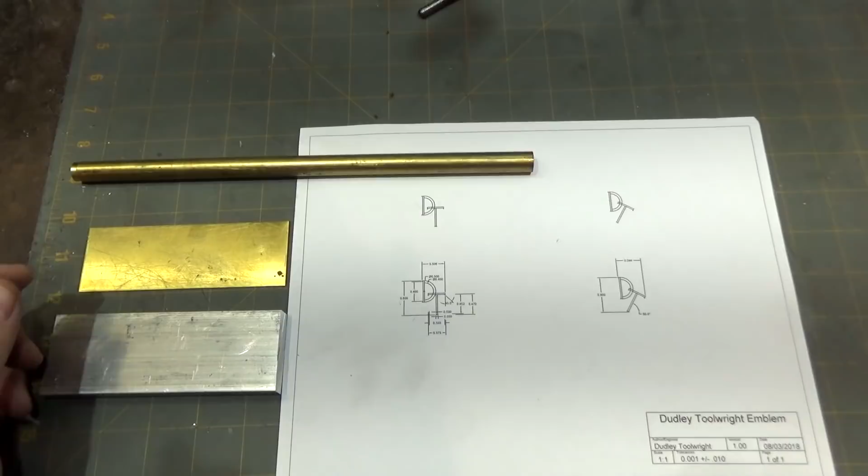Hi and welcome. This time around I'm going to attempt to make my emblem out of brass, and it'll be buried in epoxy so that I can take slices of it and use it to put on the tools I make. Hopefully it'll be clearer when I proceed further.

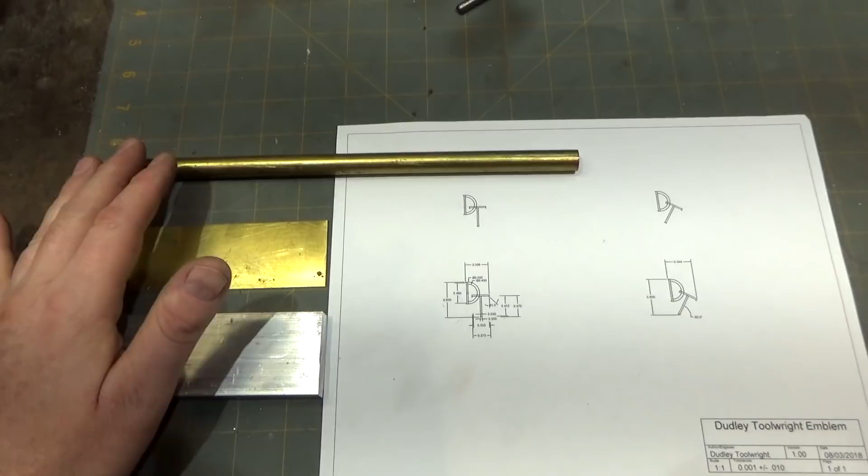I have never attempted milling things this thin and leaving profiles this thin out of such soft material. I might need to change materials from brass to something like stainless that's a bit stronger, but we're going to give this a shot.

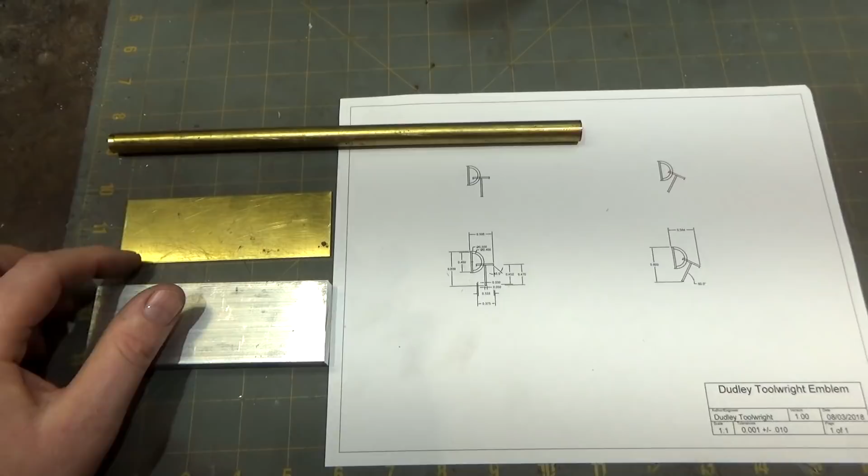First up, I'm going to take this piece of 50 thousandths brass stock and glue it to this piece of aluminum. That'll allow me to mill it down to 30 thousandths thick in the middle sections, because there are some little spurs sticking up, so I'm going to be taking 20 thousandths off of this material.

I have two versions of this. I have one with the straight T and one with the tilted T, which I kind of like. We might try both, but initially let's just see how this goes.

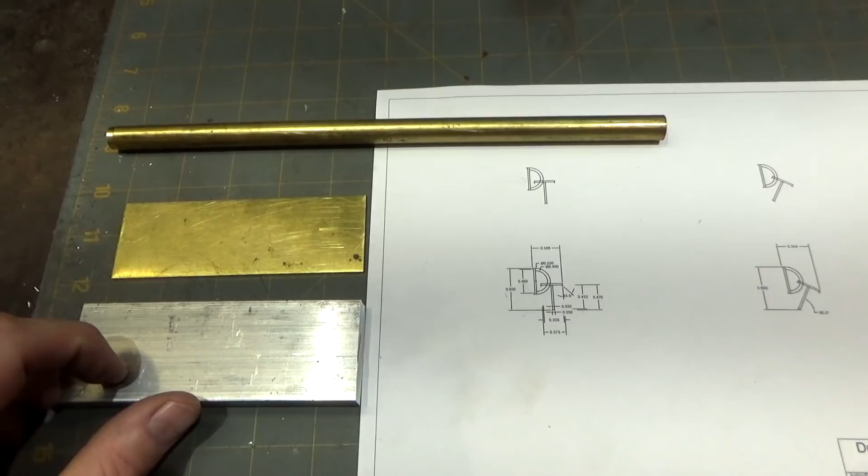So I've got to sand these materials, get some super glue in here, put this in the press, in the hydraulic press, and squeeze it together until the glue sets.

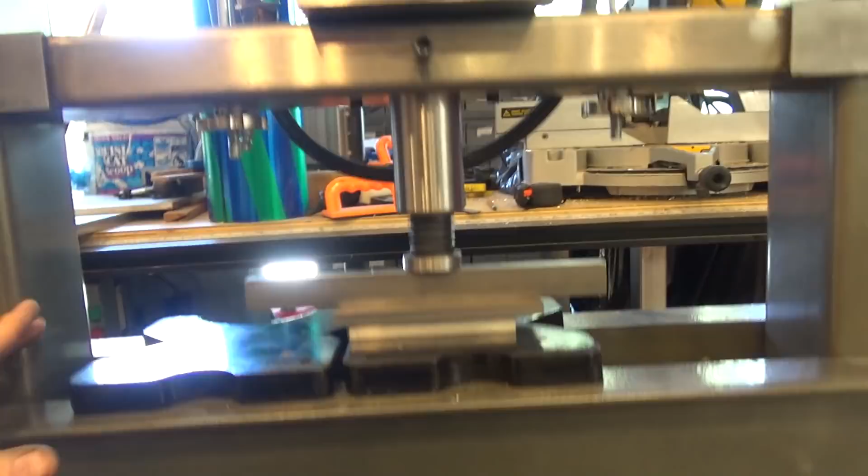So here we are at the hydraulic press, and down below here is the aluminum. Just above it is the thin 50 thousandths brass, which you can't easily see. Above that are a couple steel plates, or cold rolled steel plates, that are just for pressure spreading.

And I'm going to leave this here. I didn't crank on the pressure too much. Just put some pressure on it until it gets a chance to cure, maybe a few tons pressure. I didn't really push this thing hard at all.

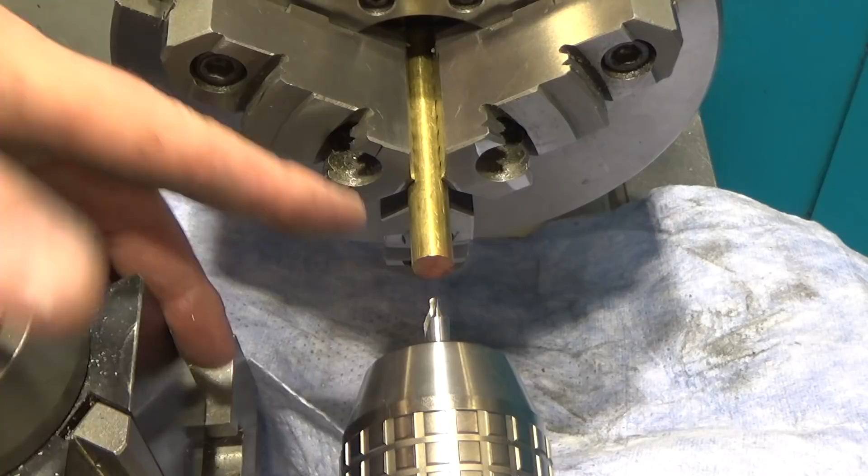So I have no idea if I'm going to be able to pull this off, because I want to get this all the way up to within 50 thousandths a side. I don't know if you can drill that close without potentially tearing it, plus I want to go in about an inch. So I have no idea if this is going to work, but let's start with center drilling and we'll play it by ear, right? Live and learn.

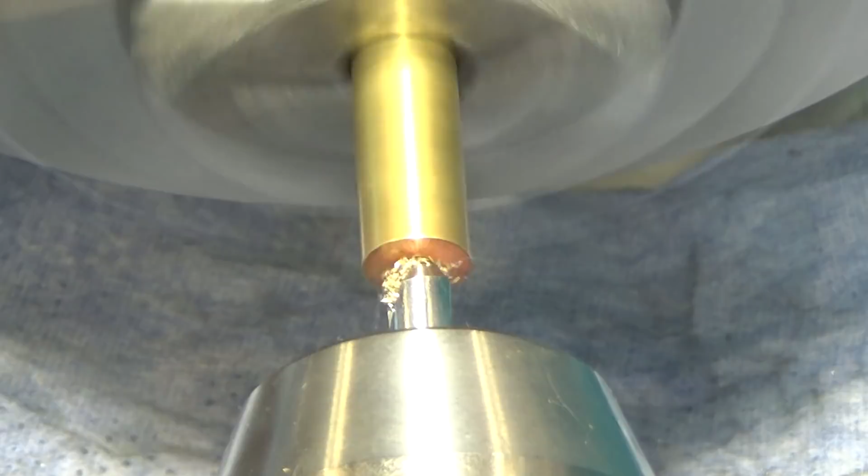Using the DRO I built into my tailstock to set depth. I'm hoping because this is brass I'm going to get away with this, but I don't know.

Chips are kind of packing in the end here. Should have retracted it sooner. It just seemed like it was cutting really well.

Alright, next up what I'm going to do is, instead of using the next size up drill, which I was going to do 3/8, I'm going to switch to a 3/8 inch end mill, hoping that that will get a straight cut like a reamer, and then when I go to about 400 thousandths, we'll see how that looks.

As you can see, this is 0.375. I want to hit 0.4, and you can see it's already looking really spooky. So I don't know, we might slow this down a little bit. Let's try 300 RPM, see how that works out. And I'm obviously going to have to peck with this.

So in the base here I have the piece that is going to serve as the mold base for this assembly from my Dudley Tool-Rite, and I'm going to mount this guy in here, and I need to drill this off center as per my drawing, and then I'm going to mill half of it off so that you've got just part of the D.

So this whole thing is going to sort of serve as a fixture where I will cover the outside with metal and then fill this with epoxy, and all of the individual brass pieces, the flats and whatnot, will be contained inside and buried in epoxy, and then I will mill it flat so that I've got my DT exposed. At least that's the plan.

So first we've got to get this thing centered on the mill, and we'll use the Blake coaxial indicator. Since my coaxial indicator is a 3/8 inch shaft, I've got a 3/8 inch spotting drill, and the pip where I turn this should be dead center, so that lets me get really close.

Then I can bring in the final bit with the coaxial. So I've got the mill centered on this part now, which will be my mold base, and each one of those divisions is 1/2 thousandth, so we're off a couple of tenths. I zeroed my DROs, so I've got my 0 point in the middle.

Now I can dial in an offset to go off the edge and mill the hole. We're going to take a 1/2 inch end mill, and we're going to drill a recess for this guy to go in. We're not going to go down that far.

So we're going to try 500 RPM here. This might be a little bit fast. Yeah, some chatter. All right.

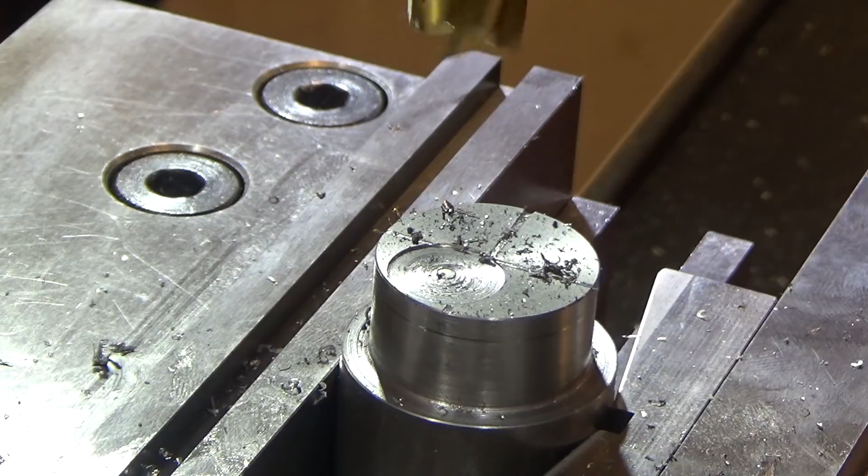So we're going to go back here. I probably should drill a center hole first, actually, because even though this is a center cutting end mill, it's a lot harder on it. Actually, it might not be a center cutting end mill. Looking at the pattern there, yeah, it might not be. All right, we're going to go grab a center cutting bit and pre-drill this hole.

All right, so here we go with the center drill. And we're going to follow that with a 1/4 inch. Here's the 1/4 inch.

Still a little high in the RPM range. That was 1,000. Maybe down to like 700.

Onto the 1/2 inch end mill. Put it up to, say, 200 RPM. That's too cold. Try 340 RPM.

Okay, and we're good.

So some poor planning on my part. I did score vertical and horizontal lines in here, but if I'd been really smart, I would have taken this guy and thrown it in the vise first and put a flat on one side so that I'd always have a reference side. Now I'm going to have to try and line this guy up. What a pain in the butt. That was poor thinking on my part.

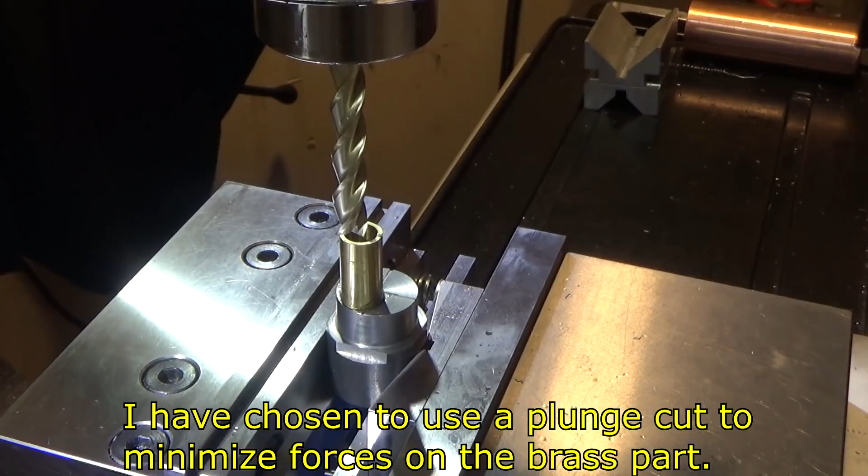Alright, so we're going to try and plunge cut this. We're going to speed up the mill to about 1200 RPM. We'll see how this goes. You want to take a smaller bite just to see how it goes. I put a depth stop on this guy. Okay, that's actually going really well.

Thousandth and a half left. I'm going to lock my x-axis. And we're going to come over here.

So now I have to do the final pass, straight across, because I'm coming down with a curved surface. So right now these have curves in them. So for the very finished pass, I've got to come straight across.

So now I can loosen this up, do my last 1.5 thousandths. Hopefully this won't squeak too much. Let's lock it off at the bottom. Not bad. It's a lot of stick out.

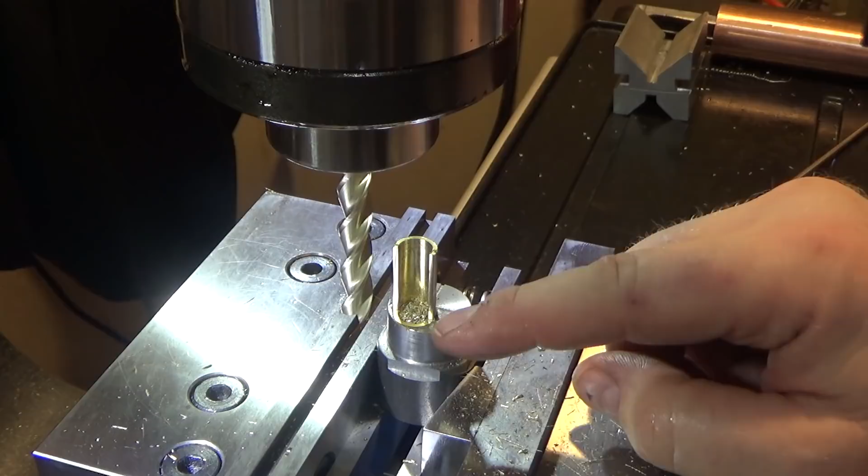Okay, we're going to call that good. So the curved part of the D is complete. Easier than I thought it was going to be. I had concerns about this much stick out. The reason why this is so long is I want to be able to cut off more than one of these because it's a fair amount of work to make. So hopefully that'll work out.

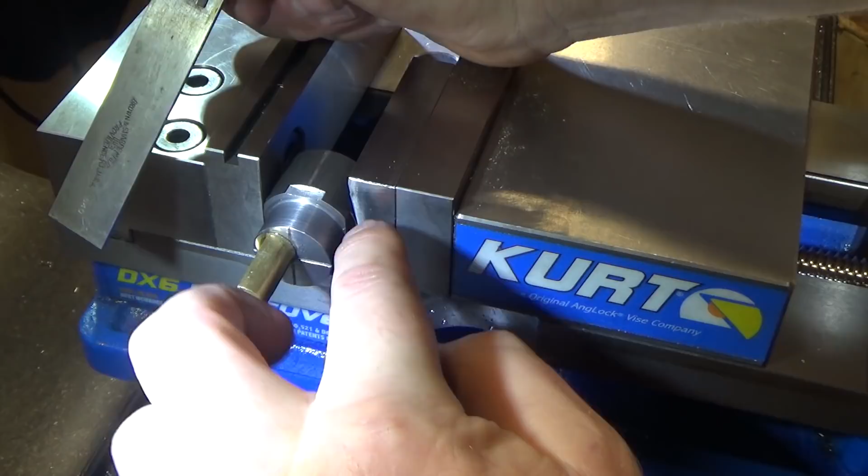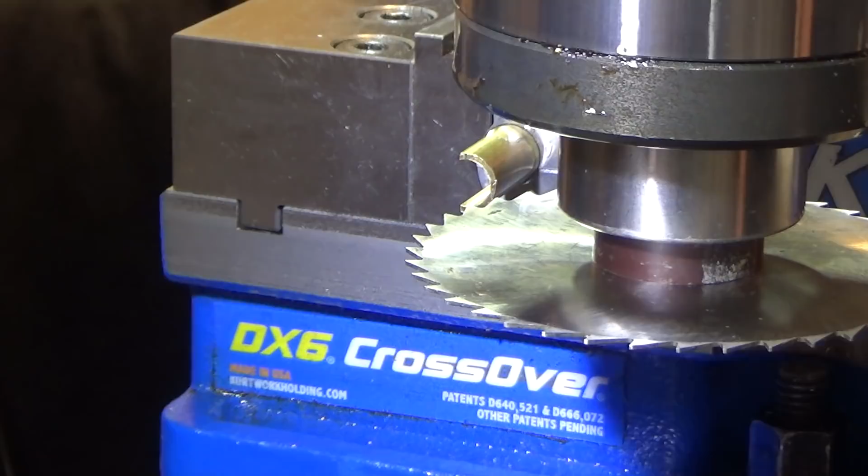I'm still not sure. So I used the flats I milled into the top of this while I was still in the vise before to set this up based on the top of my vise jaws here to get it square. So we should be good now. I don't know how well you're going to be able to see this, but I'm going to try and cut this guy.

And we're going to go in back gear, so we're going to shoot for about 140 RPMs. Let's see how it does.

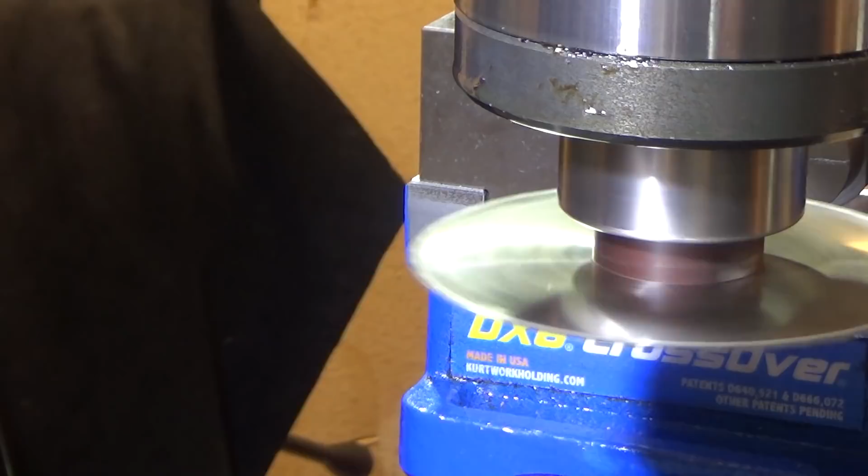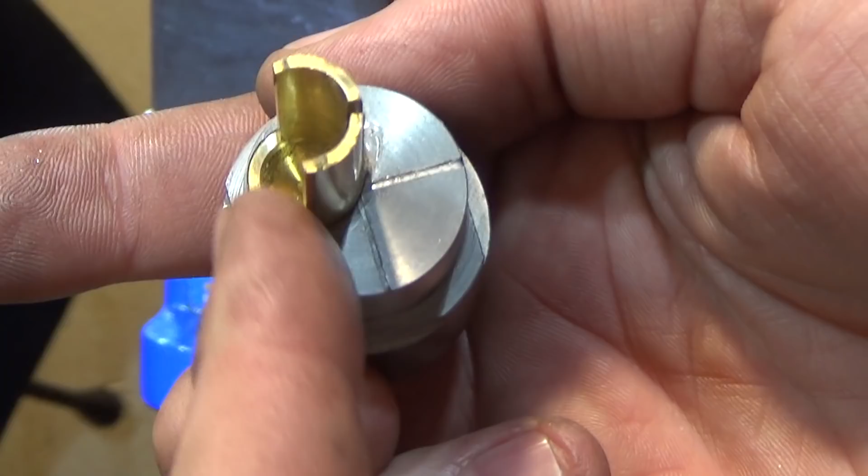So I don't know how much of that you saw, but the advantage of the direction I had the blade going was it was pushing into the work, so I was hoping that would help, and actually it looked like it didn't deflect too much. So there's the slot in it that the T is going to go in, so I need to make a flat piece in back. I need to make the T that's going to go down, and I need to press this together a little bit because it expanded upon being cut.

Built-in tension. So I have the 50 thousandths stock mounted to a piece of aluminum, super glued on. First thing I'm going to do is take this aluminum cutting bit and run it around the outside edges to square it up relative to the travel of the mill. The material is much larger than I need, so I've got plenty of room to work with, and this way I didn't have to worry about aligning it to the aluminum block. I'm just going to cut it square.

Then I'm going to come back with my indicator and find this corner over here, and set my 0 for that corner. So first step is going to be finding my Z-axis 0. Let's take this out of back gear.

1200 RPM. Let's find my Z0, just touch the aluminum a little bit. Nice. And the bottom.

Now our sides are all square relative to the table. So now I just need to find this point in the corner here after I deburr it a little bit and get my 0.

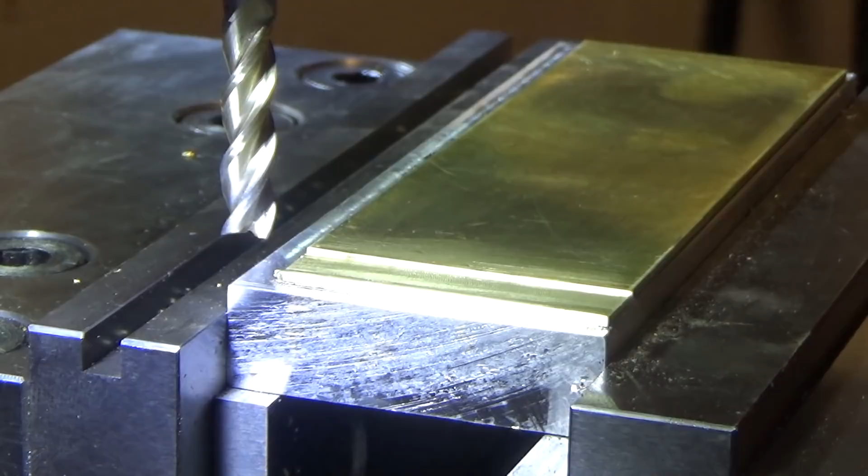Alright, so next up we're going to go Z-axis 20 thousandths, the first one, except for the end part. Now we're just going to cut out this piece in 2 passes. Do a 20 thousandths pass first. Make that 3 passes.

Next we're going to do the upright of the T, and we're going to have, we don't have a ridge on both sides on this one, just on one side. This flat side here will meet up with the cross piece on top.

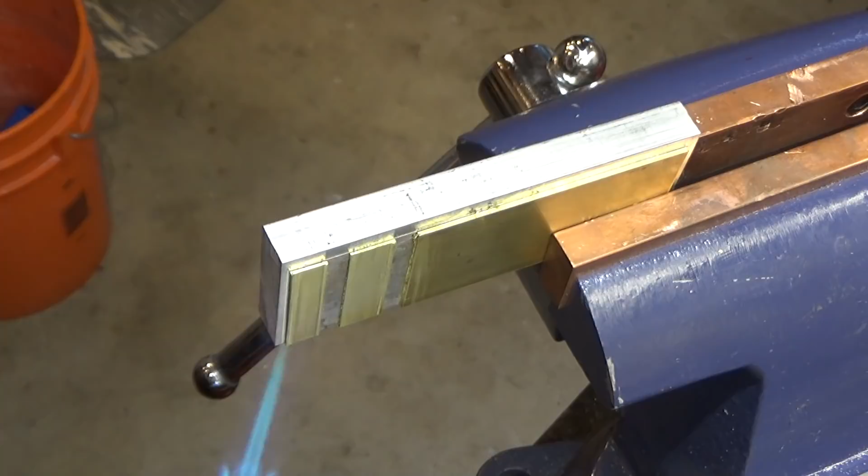So here are the 2 parts. Now we're going to try and remove them without damaging them, by heating them up, and I'm just going to use a little torch. So we're going to try and remove these guys off of here. I originally tried this with the parts horizontally, but there we go. My problem was that the torch kept going out because it didn't want to run leaning down.

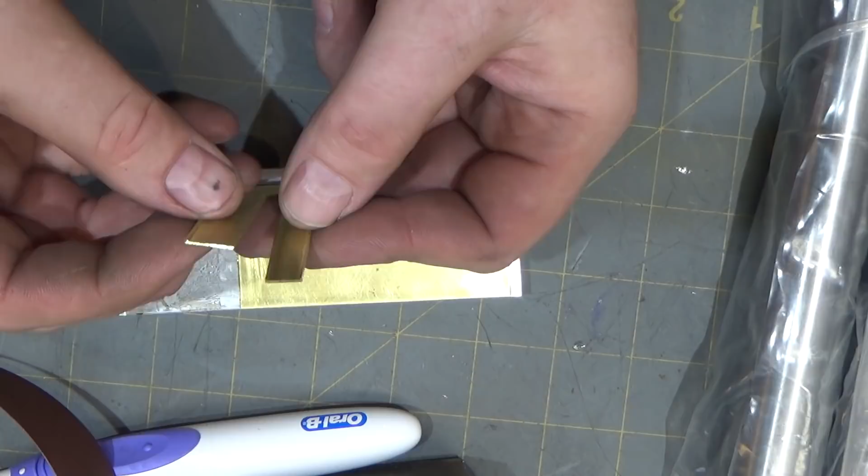Alright, so here's my 2 pieces. The other part's still attached nicely. And these will be connected together like so, which I haven't quite figured out how I'm going to do yet. I left little ridges on either side just to accent the shape.

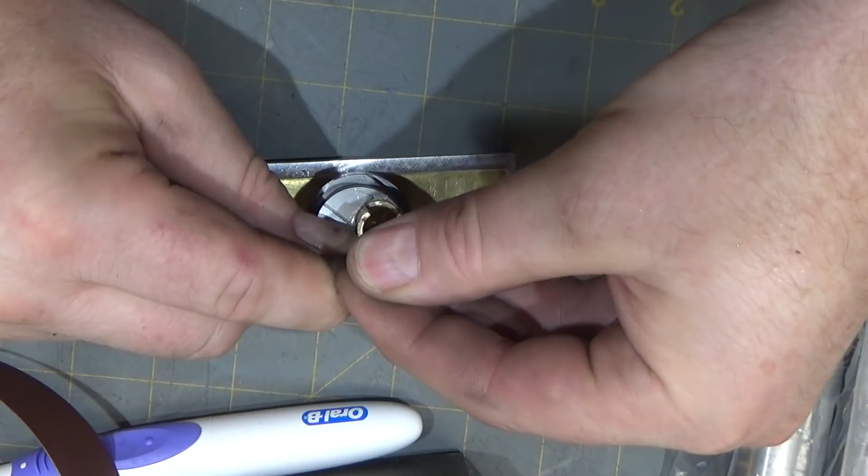And then those guys, let's see, this will be mounted in here sort of like this, and this will be mounted like this. And then I will fill it with epoxy and cut off the excess. And now you can sort of see the DT, right? So here's the part lightly glued up. These pieces are all different heights, but I will mill them all flat once I'm done.

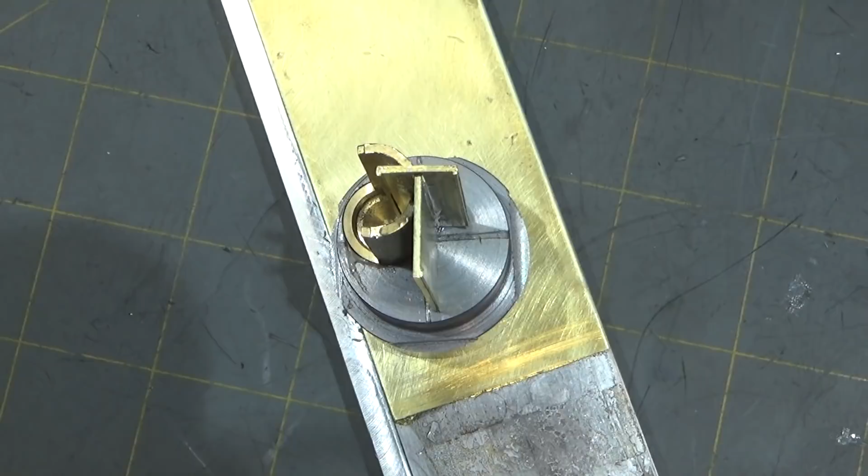So now I just need to make the piece that goes around this outside to contain the epoxy, and we should be pretty close to good. And here we are on the last couple passes, trying to get this to 1/1000ths.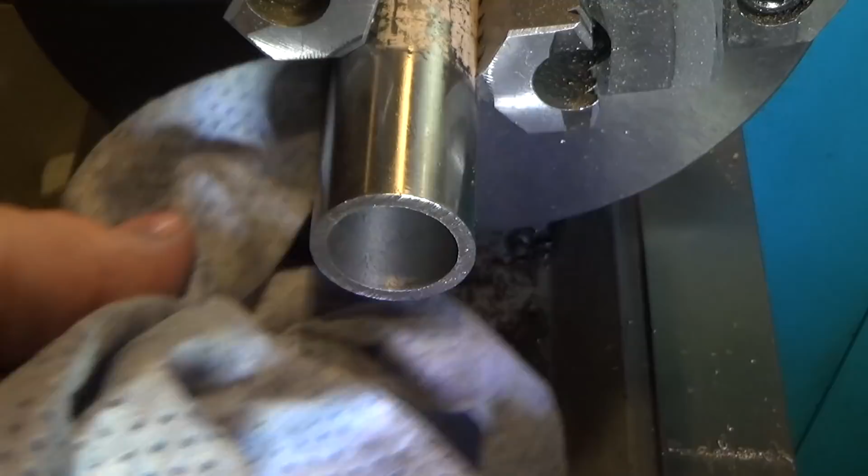So we're going to take about 15 thousandths this pass. In the last pass, we're going to slow the feed rate down quite a bit. Just to clear the chips and cool it off a little bit.

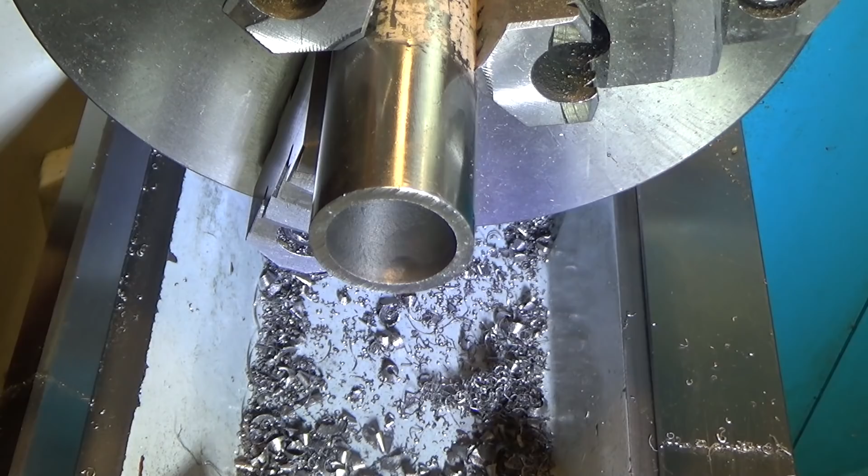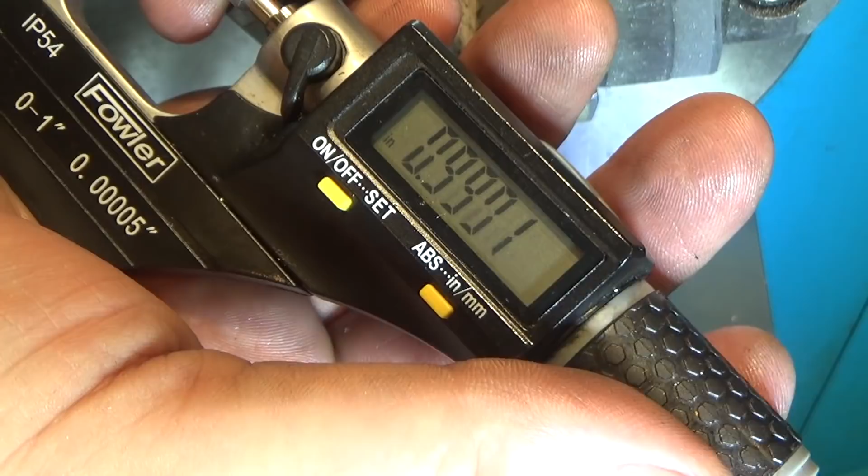Should have about 10 thousandths left. Looks like it's 11 thousandths. We don't have to be super precise. Take the last 10. So now we're just going to part this guy off.

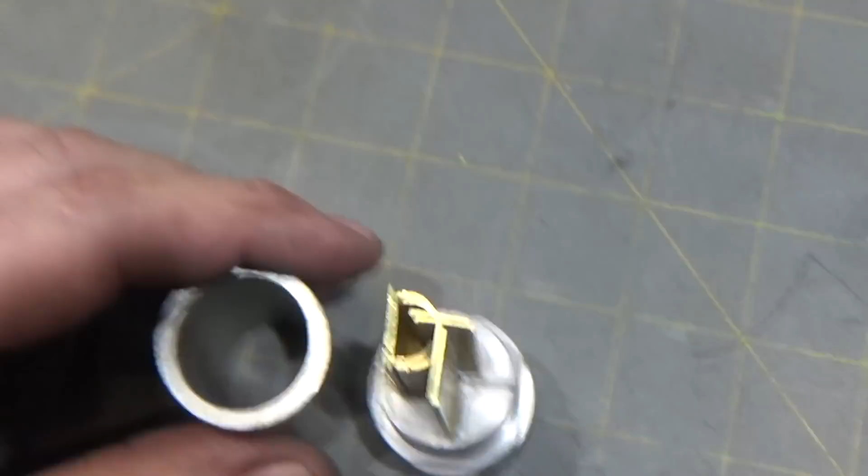So next up, we take the outside piece that I made. Sorry, it's tough doing this with one hand. Slide it over where it fits, and then fill the entire center section with epoxy.

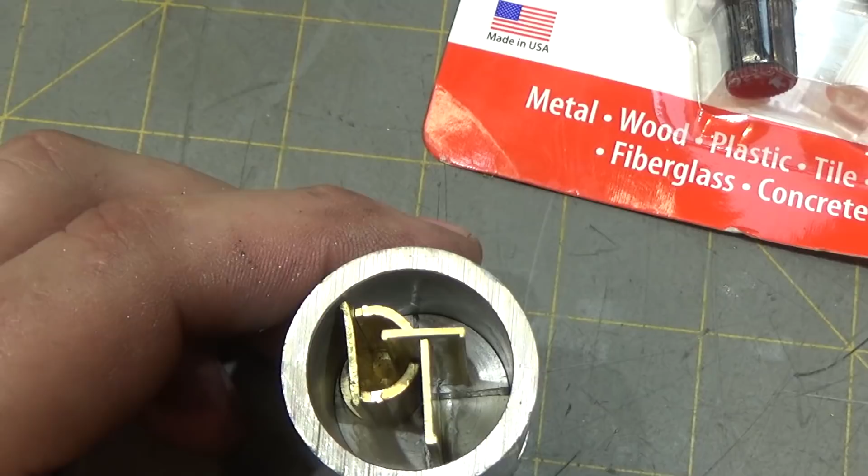I'm going to be using this JB Weld, and first I'm going to heat these up in some hot water to make them very fluid so that they'll pour in more easily, and then we're just going to fill this guy up. Hopefully we'll be able to do a good job. If I really wanted to be careful, I'd use a vacuum pump to get air bubbles out, but I don't have one at the moment, so we're just going to try it.

So I've got my epoxy in some really hot water. It's just under boiling, and I'm letting it heat up so that it'll become very fluid, and it'll probably make the reaction happen faster, so my setup time won't be as long, but this is some pretty slow epoxy, so hopefully it'll be okay. Next up, we're going to pour it into here, mix it in here, and pour it into the mold. So let's see if we didn't screw up too badly here.

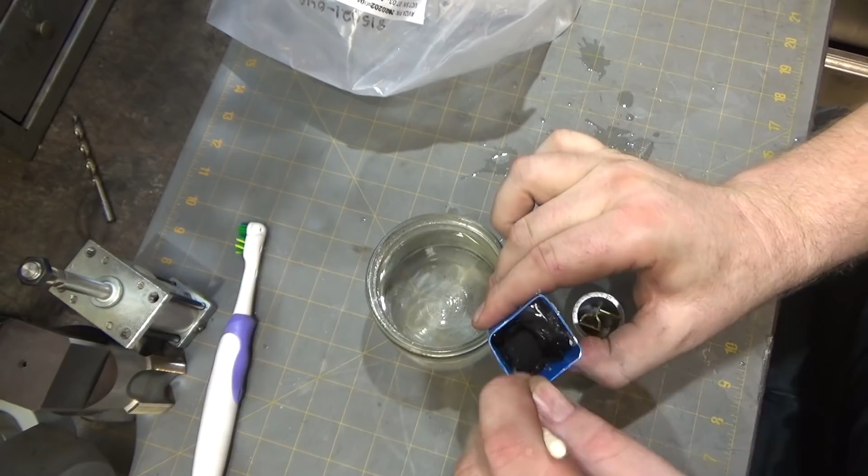All right, let's mix it up. All right, let's see if we can pour it in.

All right, now we just need to let this cure. It's going to take overnight, maybe a little faster since I heated it up so much, but we'll come back tomorrow and start facing off this end until we get to the good stuff. Hopefully this experiment will have worked.

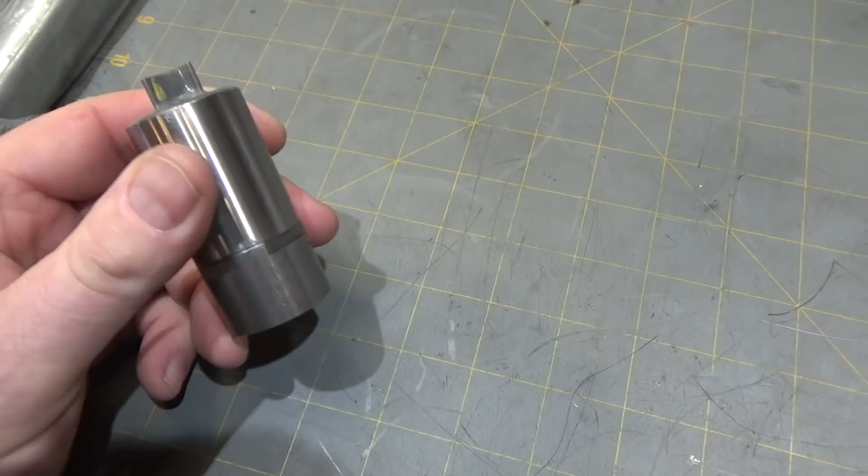So here's the part after the epoxy is cured for 24 hours. I'm going to take this part to the bandsaw and cut off the T here, and then we're going to try and face it on the lathe.

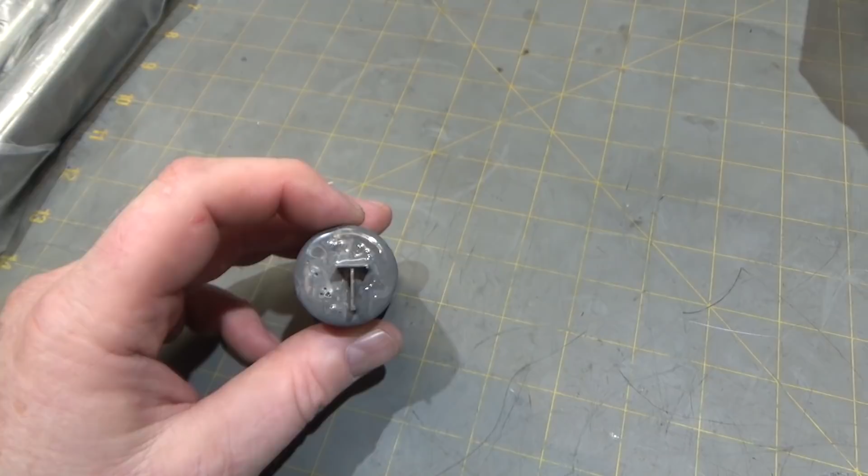This epoxy is kind of brittle, so I'm not quite sure how it's going to machine at all. It may not machine well, and this whole thing may be a disaster. Also, I was kind of hoping this epoxy would be darker than this. I thought I remembered it being darker, but this is sort of a medium gray. Anyways, let's trim this off, put it in the lathe, and see how we fare.

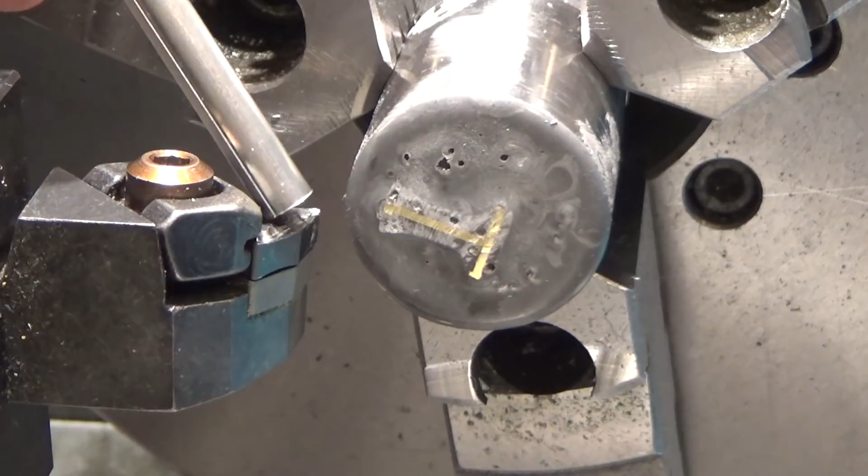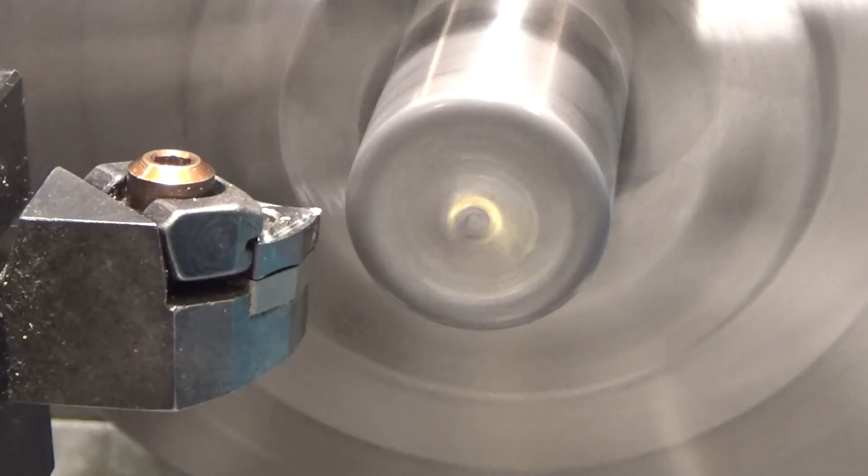So we've got a positive rake insert here for aluminum. Hopefully that will be really sharp and cut right through this stuff, but I really have no feel for how the epoxy is going to cut. Is it going to turn to powder? Is it going to shatter? And then how's the positive rake insert going to deal with the stainless steel when I go to take a skim cut? But let's just give it a shot. We're going to go really low feed rates.

Alright, so here's my Z0. Let's try 20 thou depth of cut, see how it goes. Oh, you know, I might want to change the angle of my cutter to give more clearance, but let's let it go for now.

Eventually it's going to be an interrupted cut too, once we get to the brass center part.

So we're going to have to sand and polish this to get a nice finish out of it, I think.

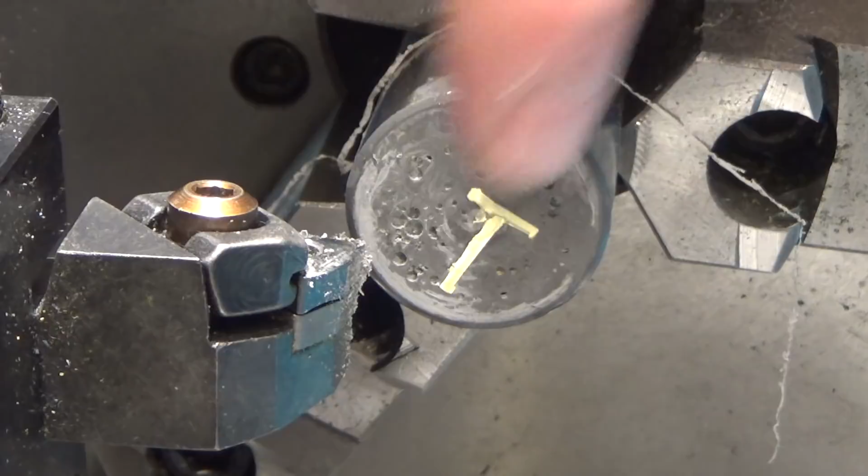Alright, let's see what that kind of looks like. Now I sort of see that, and that is, oh, there's some air bubbles in there. That's unfortunate. Alright.

Kind of a fast feed rate for the stainless. Probably don't want to generate too much heat, although the chip breaker is engaging nicely.

Have a bit of a cold.

Still haven't gotten down to the D. Whatever happened to the D?

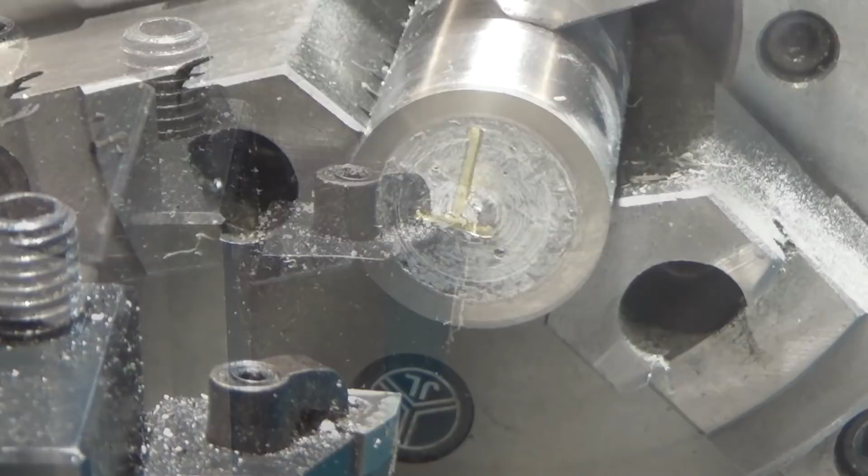I see part of the D.

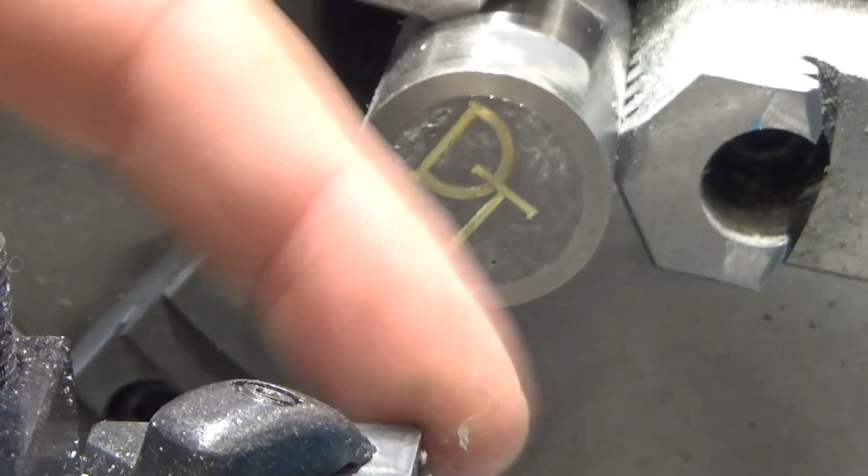So next up, I think I am going to try and switch to a positive rake insert and take a 1/1000th pass and see if I can clean it up a little better. I don't know that I'll be able to, but we're going to give it a shot and see if there's any improvement. This epoxy does not cut very nicely at all.

Stainless got a nice finish. I think the epoxy might be kind of hopeless.

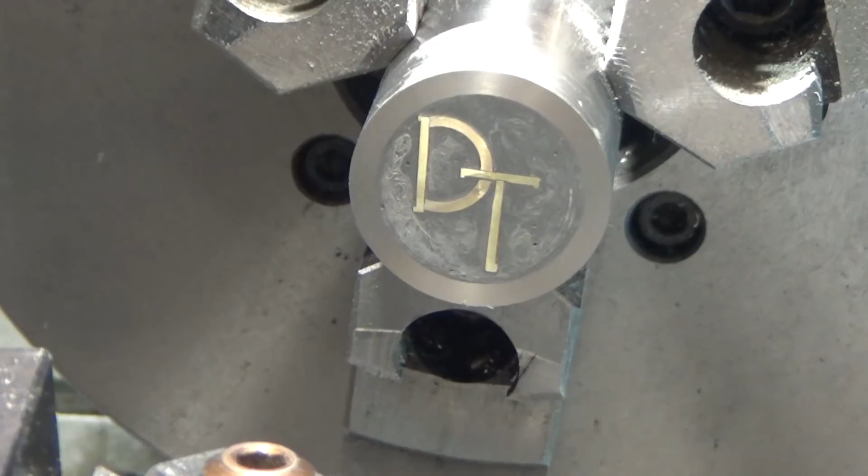Oh, that's not so bad. All right, there we are. So now I can slice off small pieces of this and insert it, but let's see how it sands up. I'm going to try and finish this and see how well it takes a finish.

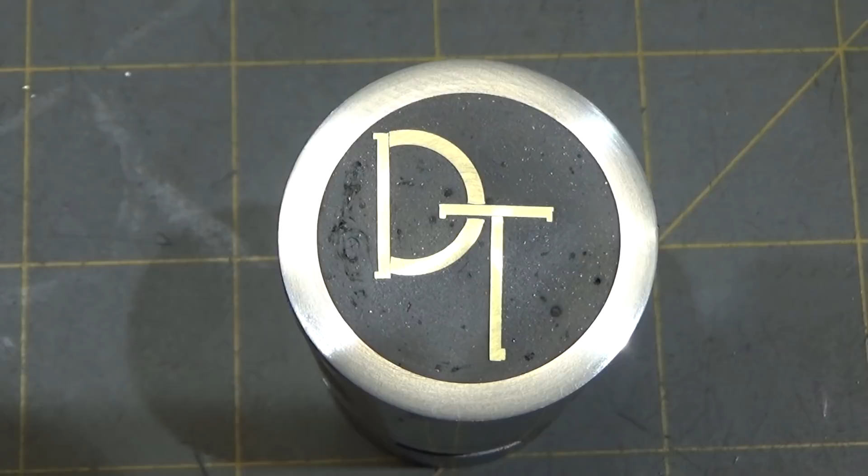I'll be right back. So here's the final product, and it could be better. I need a vacuum chamber to suck the air bubbles out of the epoxy. I stirred it well, but apparently not all the bubbles rose to the surface. Also, heating it might have caused it to cure faster, which locked the bubbles in place. So not ideal. I'd also like a darker epoxy than this one because I think it might look nicer with more contrast.

But this is the idea because this DT goes all the way through, so I can cut off an 1/8 inch slice off this and then bore a hole and put it in my work to identify that I made it. This was my first attempt, and it was just an idea to see how it went, and I think it turned out pretty good.

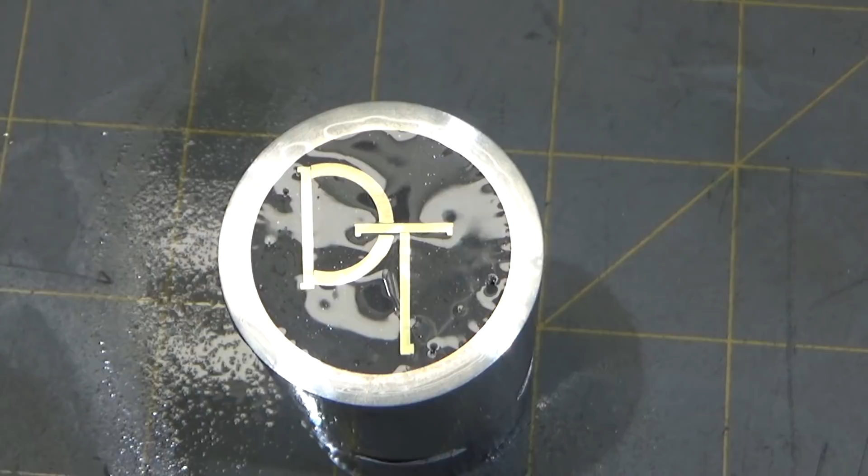So one more thing, I could put a clear coat over it and sort of simulated that with some alcohol here. I don't know, that might be a little better, although it's kind of funky.